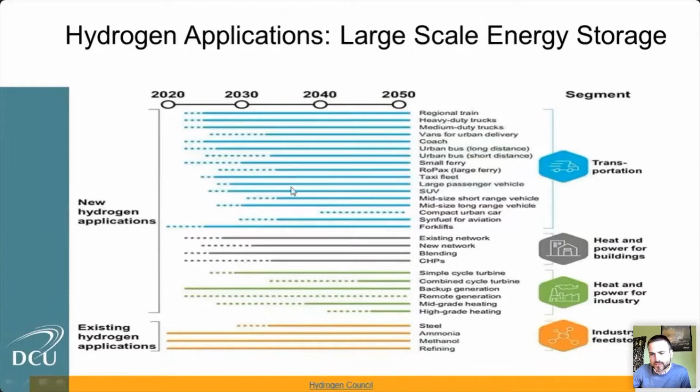as well as north with the United Kingdom. So what I'd like to see first is the applications for hydrogen going into the future. When are they coming, and what is coming for us on the island? So this is a graph here from Hydrogen Council, and they show existing hydrogen applications and new hydrogen applications. But actually, I developed a hierarchy for Ireland from what our island gives the opportunity around. And really, it's very similar to Hydrogen Council.

Industry certainly has an opportunity for hydrogen, looking at those industries that currently use hydrogen, that can use hydrogen, and if they exist on the island, they're the first demand that hydrogen should go to. And I think Thomas mentioned a really good point there, that producing all this hydrogen and the opportunity around production is only one side of the story. You need to see the demand and where it's going. And that's an important thing when you're developing a low carbon society, when you're interacting with large amounts of renewables and wondering where the place for hydrogen is.

So heavy transport, and it's great to see Northern Ireland developing their heavy transport in the public transport sector, in buses, and it's more than trials. When you're getting to 20 buses, it's a deployment of hydrogen vehicles, and it's great to see a hydrogen bus manufacturer in Northern Ireland as well, so we can develop transport opportunities on the island. And again, we see heavy transport deploying trials and small deployments at the moment, and by 2025 it should be quite normal. And then heavy transport bringing in trucks and further deploying that at the 2025 scale will be very important.

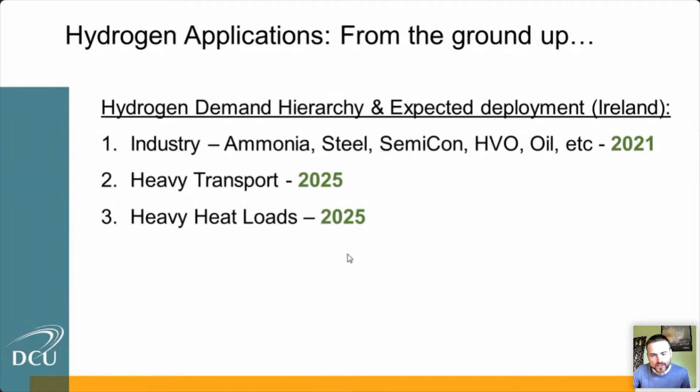Heavy heat loads then, in relation to the industry that use temperatures for their processes in the range of 200 degrees or even plus or minus. That's the kind of area where heat pumps have difficulty. The only option is natural gas at the moment, and obviously that can evolve into hydrogen. Then the gas grid obviously is very important, as Thomas said. The grid on the island is hydrogen ready, and there are a few modifications around safety and security and upgrading to your houses and buildings. But that is an engineering problem, not a technical hurdle.

And then the regeneration of hydrogen back into electricity, and I'm going to talk a little bit about that in a minute. That's something that really allows renewable energy to grow uncontrollably into the future, and it scales out renewable electricity, because now we can capture this excess renewable energy and then deploy that energy as electricity when the wind doesn't blow and the sun doesn't shine. That certainly is an opportunity for Ireland, for the UK, and many countries across this part of the world where there's a lot of wind opportunity to deploy, and a lot of storage potential required.

And I'll talk about that in a minute. And then direct electricity into fuel cells, directly electricity. That again is not a thing we should do today because we have other options, but certainly in the future, when we're looking at direct electricity through fuel cells, the expense will reduce and the opportunities will be there.

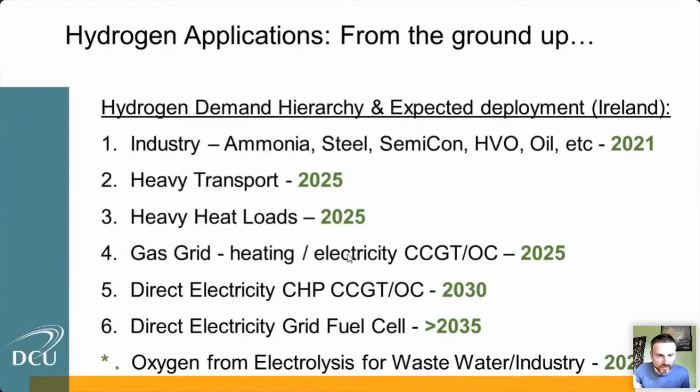And I like the way that Thomas mentioned oxygen. If you're producing hydrogen from electrolysis, there's a huge amount of oxygen produced. And again, the wastewater industry, to develop that, to make it more efficient, to allow more waste to be processed in the one site. I think that's a huge opportunity. And again, we see that today, 2021, as an opportunity.

So again, I'm not going to talk much about the potential, but the potential of our republic, let alone the north, is massive. And I just wanted to pull this together. This applies to the island, the United Kingdom, Scotland, Northern Ireland. We're quite lucky to have industry, transport, electricity need. We have renewables being deployed. We have a gas grid, but we've also got a very educated and experienced workforce on the island. That's very important when you're deploying technologies and creating that innovation.

When you want the lights on, obviously you need renewables. But as I mentioned, if you had some extra renewables, to avoid the overcapacity of renewables, storage is definitely an option. And then there's always an opportunity to fire that hydrogen to export, and that's a global opportunity, as Paul mentioned earlier on as well.

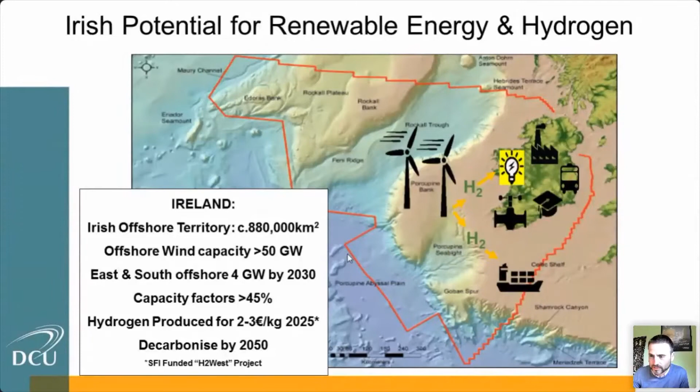So let's look at storage, and let's look at opportunities on the island for storage. When you model storage for electricity, you look at the minute, the hour period mostly. And that technology is perfect. It's deployed, and it allows our electricity system to interact with a fast response with renewables and batteries. Once you go up to the hours, batteries become important, but batteries only have a certain amount. They fill up, they get full.

When you have 2-3 days of lots of renewables, unfortunately the batteries are full after a couple of hours, so they can't fill up for the extra days or weeks where there's extra wind or solar. So this then opens opportunities around pumped hydro, compressed air, and obviously hydrogen storage. And that's really what I want to talk about today.

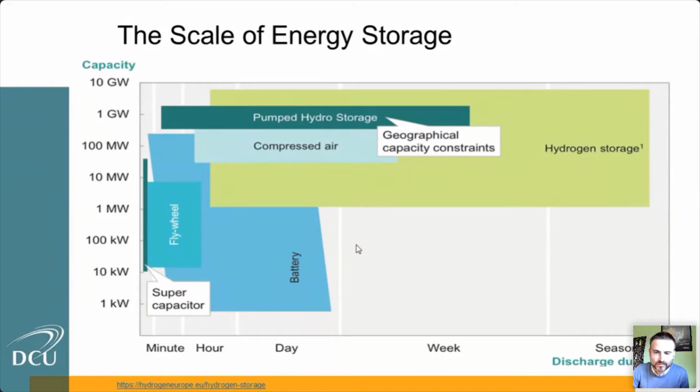I want to give the idea of the type and scale of hydrogen storage that we're looking at. When you're looking at battery storage, in my head, what I think of is a field full of containers, and within those containers lots of batteries. And that's a nice idea, it's simple to think about. But when you think about hydrogen, you have to think bigger, way bigger.

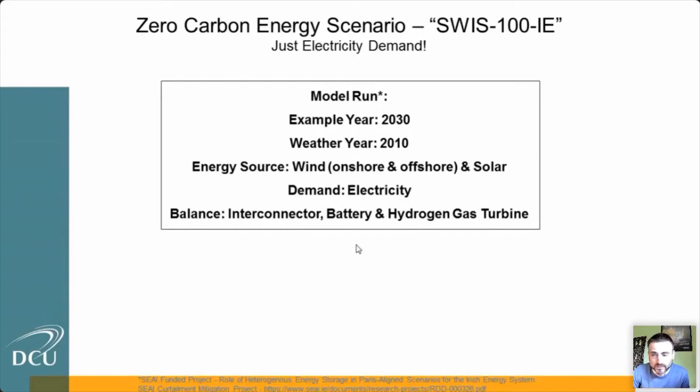So to do this, it's not just thinking about it, we actually run models in Dublin City University. We've developed a model called SWIS-100-IE, based on the island of Ireland. We've options on the Republic, and then an all-island model. The idea is to look at solar, wind, interconnection, and storage within the system. We don't interact with bioenergy at all. We can interact with bioenergy, nuclear, lots of other stuff, but for this particular model we don't. For this idea here, we're just looking at electricity.

So this is the problem with wind resources. In a period like today, if you look outside, the very still weather we're having at the moment. This is due to low pressures or high pressures that come over the island, and that means there's very little renewable energy generated. So we need a lot of storage if we are to look at a 100% renewable system just running on solar and wind.

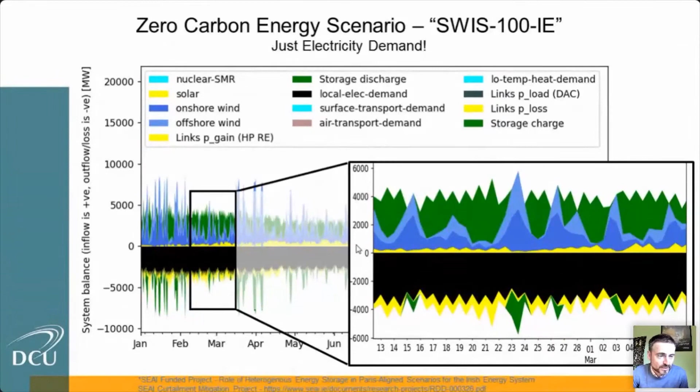So if we look at this, we have peaks and troughs here, and the green represents filling that in with hydrogen generated from combined cycle gas turbines. And again, the black on the bottom represents demand. Demand doesn't slow down just because it's a still day. So let's look at this a bit more focused.

And what we're able to see with that period of time, say in the February-March period, or across the year, is that with storage we're able to pull a lot of electricity in from the interconnectors into the island. We're able to pull in about half a terawatt hour of electricity from interconnectors into the Republic. But then obviously in February, March, if we don't have any storage of anything else, we have to rely back on fossil fuels.

So in our model, we looked at hydrogen storage in the range of, say, January, February, March, the area I was looking at there. We need in the range of around 1.5 terawatt hours of hydrogen storage. And across the year, and this is just for electricity, we'd need probably just over 2.5 or 3 terawatt hours of hydrogen, as well as the 0.5 terawatt hour of interconnection that is there, as well as the gigawatt hours that we get from the pumped hydro that we have on our system. So that was just electricity.

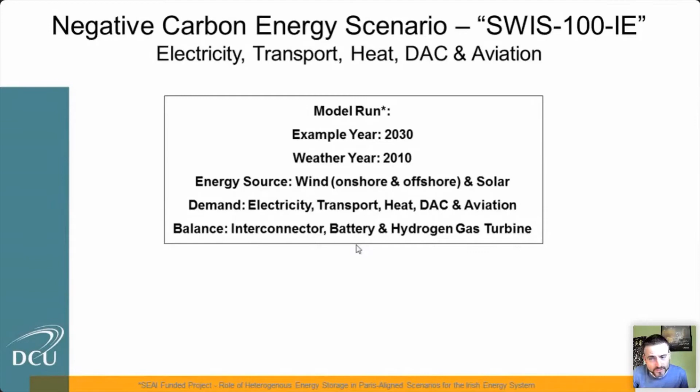So let's look at the entire Republic of Ireland energy system, assuming it's 2030. We've chosen a weather year of 2010, and we're looking at just wind, onshore and offshore, and just solar to supply the energy. And our demand is everything: electricity, transport, heat, direct air capture. We're going to take some carbon out of the air as well, and we're going to facilitate aviation as well. And all we're going to use to balance that is an interconnector, battery, and hydrogen gas turbines. So let's see how this works.

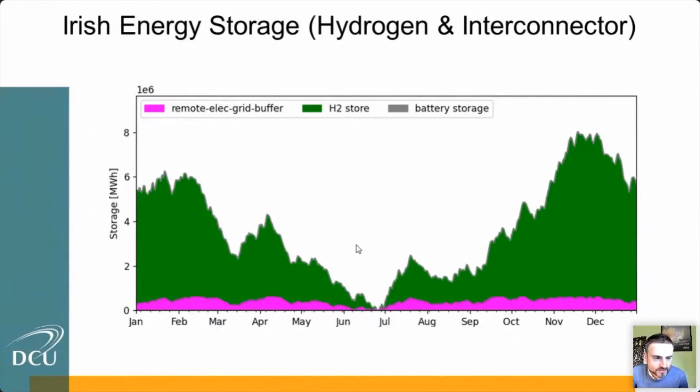So again, this is the same amount of storage we're looking at here. And what we can see is that overall across the country, we need about 8 to 10 terawatt hours of storage to decarbonize absolutely everything. Now our interconnector hasn't changed; that's still 0.5 terawatt hour. And again, the reliance will fall onto hydrogen. Battery here is a grey line. You can slightly see it on the top line here, and it's really interesting to have batteries. For batteries, 3 to 6 hours is perfect.

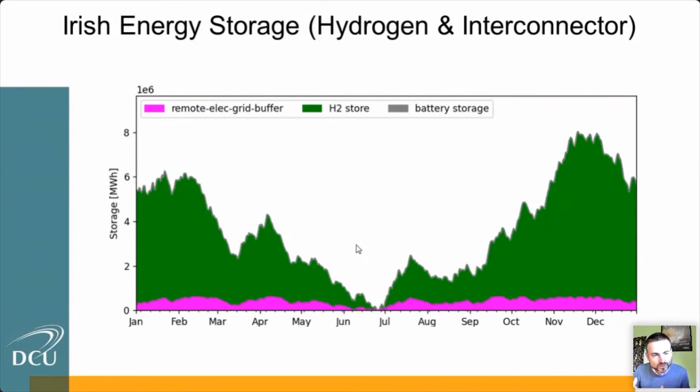But when you're looking at moving energy over months, from April to May, June, or July, or from August right back to January, when you're moving that much energy and storing it, hydrogen will play a huge role there. So that's really great modeling, but can we actually store this amount of energy? So we looked at this.

So hydrogen storage in salt caverns is quite straightforward. You dissolve out a cavern with water. You process that salt so it's not damaging the environment, and you have a cavern left that's impermeable to hydrogen.

And basically you make loads of them so that if you get any issues or subsidence or anything underground, you don't have any problems overall. But the theoretical potential of Larne is around 180 terawatt hours. That's actually the theoretical that's plausible across the whole north east of Northern Ireland.

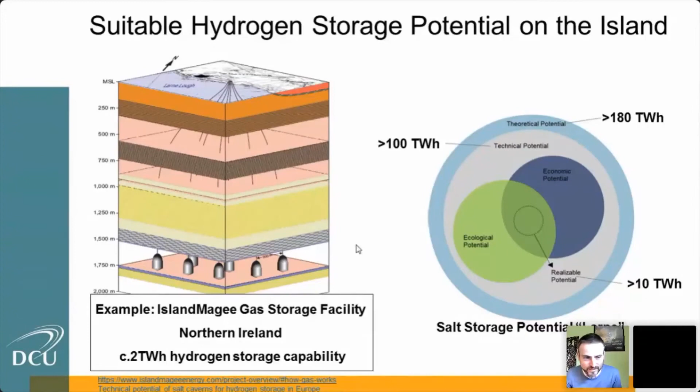There was a question from Juliana Steinbeck, and the question was, what is the best way to store hydrogen in Ireland? I think your last slide has answered that and has provided all the technical opportunities there.

Can you hear us? Sorry, Paul, I lost you there for a second.

Okay, Juliana's question was, what is the best way to store hydrogen in Ireland? And you've talked about the salt mines. In addition to that, are there other options that would be feasible or commercially opportunistic? Yeah, sorry. So our model looked at steel containers, and we also looked at salt caverns. And I'm looking at scale here. We're looking at terawatt hours, so hundreds of thousands and into millions of tons of hydrogen stored.

So that's the scale. If you go down to small scale, obviously for your cars and your mobility, small scale storage is compressed hydrogen or metal hydride, chemical hydrogen storage. But as you scale out from 2021 right up to 2035, salt cavern storage probably is a reliable and potential economic opportunity at that point.

But as we go from here to there over the next decade or so, we see that metal storage will be important initially. So you'll have hydrogen stored on site in tankers, stored in the supply chain as it's moving from where it's produced to where it's delivered. Those tankers, whether on road or on rail, will be important. The gas grid itself is going to be really important.